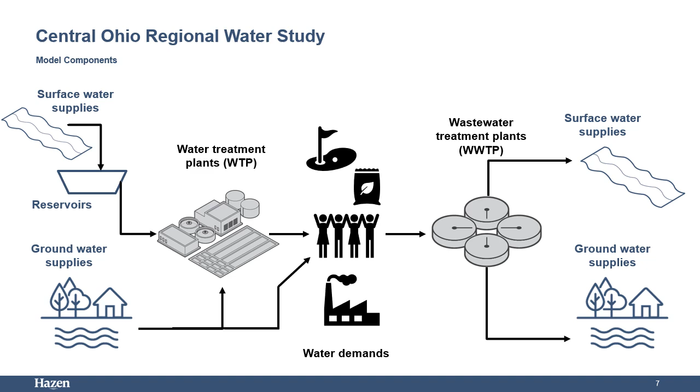Groundwater availability was estimated at the HUC 10 watershed level. To explain, HUC stands for Hydrologic Unit Code, and the 10 stands for the number of digits. The U.S. Geological Survey has delineated each of the watersheds in the country and assigned them a specific number based on their location, similar to a zip code.

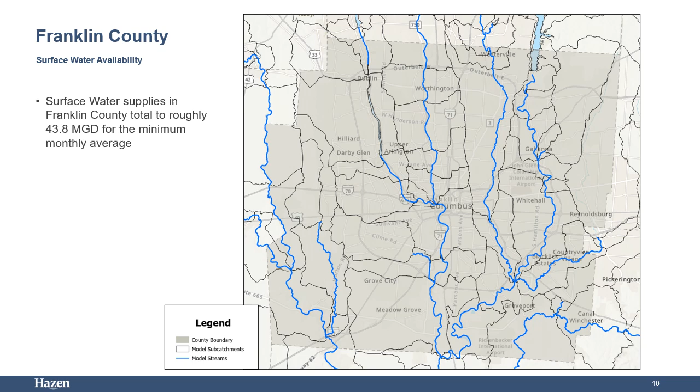The surface water availability value on the previous slide represents the total daily availability of surface water throughout the county during the minimum month as a function of precipitation, temperature, upstream flows, and land cover characteristics. This value does not yet take into consideration the benefit of storage, such as reservoirs, that allow for additional surface water to be available during dry periods.

The City of Columbus raw water supply from surface water is stored in or supplemented by reservoirs. The Columbus Dublin Road plant pulls water from the Scioto River, which has supplemented flows from O'Shaughnessy and Griggs reservoirs, which are both in-stream reservoirs. Additionally, the Scioto River can be augmented from upground reservoirs. The Columbus Hap Cremean plant has its intake on Big Walnut Creek, which has supplemented flows from Hoover Reservoir. Hoover Reservoir also receives augmented flows from Alum Creek Reservoir.

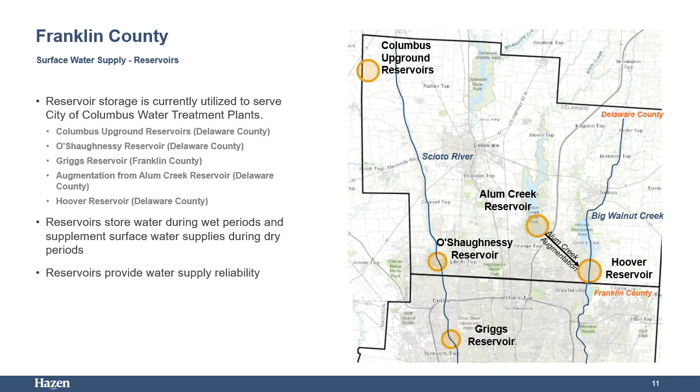The Integrated Water Resources Model accounts for the benefits of reservoirs, therefore allowing the City of Columbus demands to be met by daily surface water availability that is a function of climatic conditions and upstream storage.

Adding both the groundwater and surface water supplies together, it is estimated that Franklin County has roughly 163 million gallons per day of total available raw water supply. This supply availability is roughly 70% groundwater and 30% surface water. Supply availability at the sub-county level varies by location based on aquifer yields and surface water tributary area, and does not include raw water storage in reservoirs as presented on the previous slides.

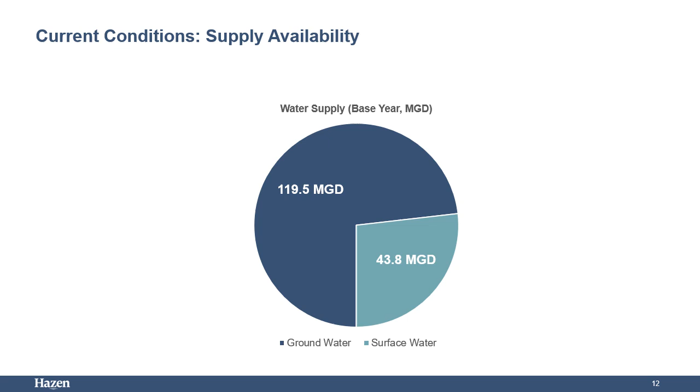The next focus for this resource evaluation was the existing and future demands that draw raw source water from the available water resources. Data on water demand was developed using population data, which was available on a regional basis. The information on current county population was obtained from MORPC, the Mid-Ohio Regional Planning Commission. These population data were used to further calculate water demand.

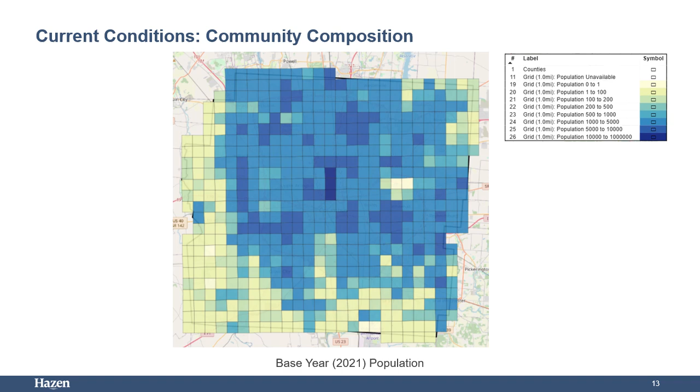A per capita water use was calculated for each service area. This was calculated by taking the water production data and dividing by the assumed population within a service area, which resulted in a per capita water use of gallons per person per day. This per capita water use includes all types of users within the service area, whether it is residential, commercial, or industrial.

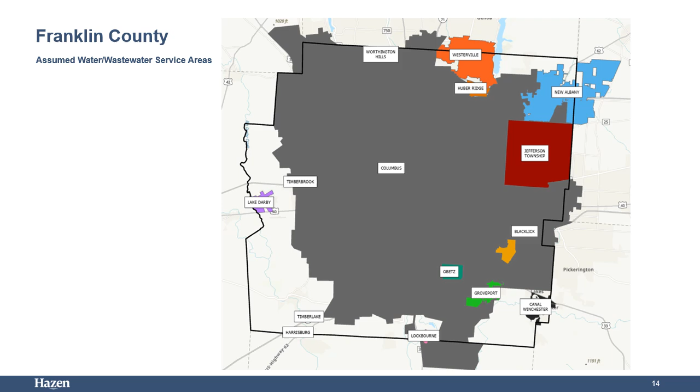It is important to note that in future conditions, no service area expansion was assumed, and the water per capita use for each utility was assumed to stay the same. This means that growth in projected population would also mean a proportional growth in commercial and industrial demand within the utility service area boundary. For future water demands, the per capita water use was multiplied by the assumed future population within a service area.

The next demand, shown in light blue, comes from the private water systems. Private system demand is calculated using the population not within an assumed service area. This population is assumed to be self-serving using groundwater wells. The per capita usage assumed for these private water users is 70 gallons per person per day. The total demand estimated from private water systems users is approximately 1.3 million gallons per day, indicating that the majority of the population in Franklin County is served by a municipality.

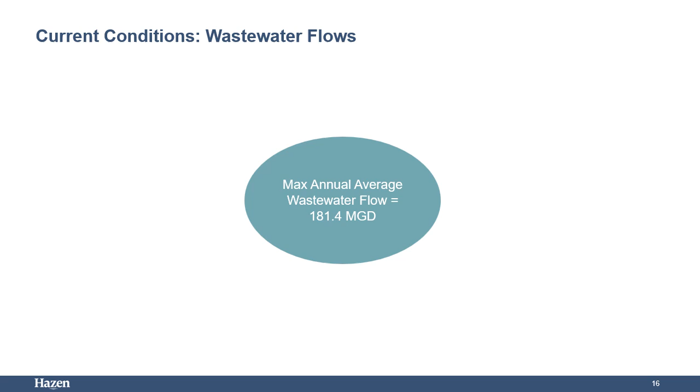This is due to the wet weather impacts observed in wastewater due to the inflow and infiltration impact. During rain conditions, areas with combined sewer systems could see very high flow rates, while during dry times, only the base flow is observed. High rainfall in a single month could skew the average. Therefore, an overall annual calculation is used to determine if a particular plant is nearing its permitted treatment capacity limit.

The existing demands and flows can be compared to the existing infrastructure. In Franklin County, there are a number of water treatment plant facilities, and their total capacity is just over 271 million gallons per day. Roughly 22% of that source water is pulled from groundwater and 78% is pulled from surface water, or the local streams and rivers. A large portion of the water treatment capacity in Franklin County is owned by the City of Columbus, where 2 of the 3 plants pull from surface water and the 3rd plant pulls from groundwater.

Remember that the maximum daily water demands are about 156 million gallons per day. So, in the current conditions, the county has sufficient capacity to provide treated water to meet demands.

From a wastewater treatment plant capacity standpoint, the county has just over 187 million gallons per day of permitted capacity at the existing facilities across the county. The current maximum annual average wastewater flows generated by the demand and inflow and infiltration are about 181 million gallons per day. Again, the existing county infrastructure is sufficient to meet the current wastewater flows.

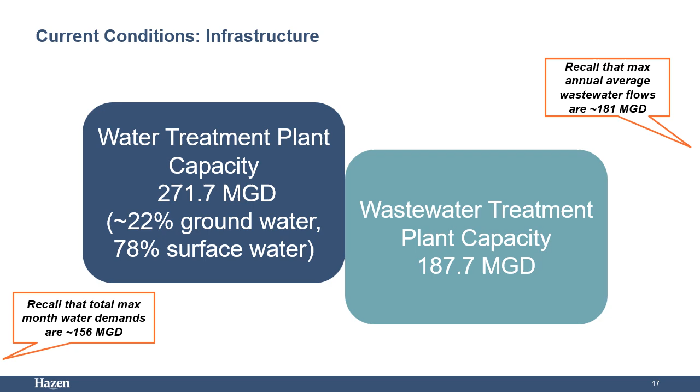With an understanding of the current conditions in the county, the next step was to expand the analysis and explore potential future conditions. This study evaluated conditions in 2030, 2040, and 2050. When analyzing future conditions, current data is projected from the present to the future in time. With that projection comes uncertainty, which is why analyzing multiple potential future scenarios can provide more resiliency and reduce the risk of failure. Scenario planning acknowledges there are several plausible future conditions that may occur and allows planning for several possible future conditions.

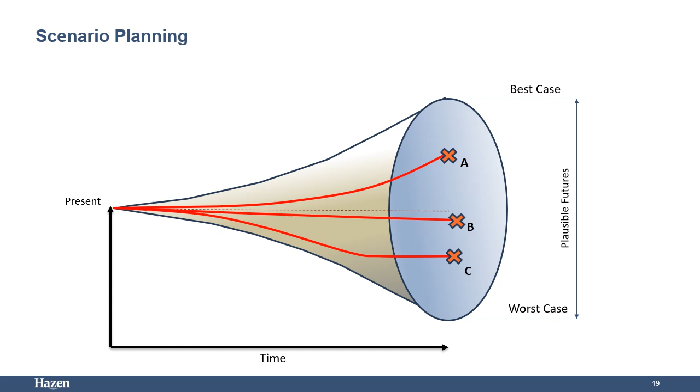4 model scenarios were developed to define the range of potential futures. Scenario conditions that were explored were 2 different precipitation and temperature changes and 2 different population estimates, totaling 4 different model scenarios. The different inputs of these scenarios will be explored further on the following slides.

2 population sources were used for the scenario modeling. The expected growth trend was informed by the Mid-Ohio Regional Planning Commission, or MORPC. The MORPC population projections were informed by local zoning and land use plans. The historical growth trend was informed by the Ohio Department of Development, or ODOD. The ODOD population projections are informed by historical birth, death, and migration trends.

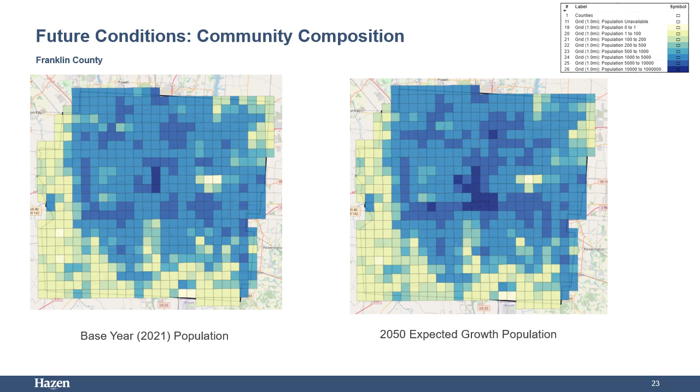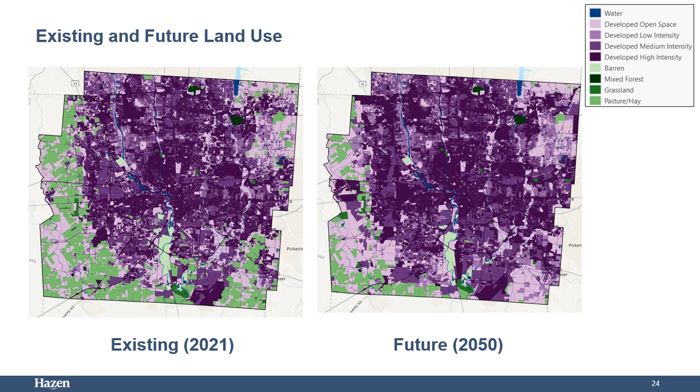Over time, it is estimated that development will occur in areas which were not previously developed, as seen in the southwest portion of the county. Additionally, it is estimated that already developed areas will become high-intensity developed areas, which can be seen on the right figure. As an additional note, when using the dashboard tool associated with this report, Franklin County land use is displayed in quadrants due to the number of features.

Another element of the scenario modeling are the different temperature and precipitation scenarios projected. Historical precipitation and temperature data from 1983 through 2022 were used to estimate the surface water runoff and evaporation. For the future conditions, change factors were applied to the historical precipitation and temperature data to analyze the effects it may have on surface water availability.

Temperature and precipitation changes were based on the global climate model data downscaled to the Central Ohio area. There are different change factors for each month and future planning year, 2030, 2040, and 2050. Change factors were extracted from an ensemble of 49 global climate models from the Intergovernmental Panel on Climate Change.

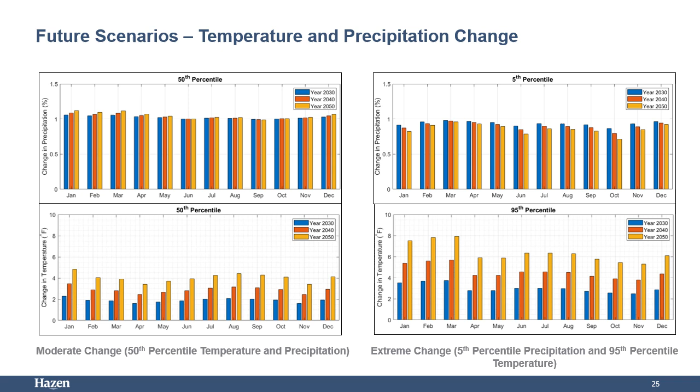The extreme change scenario that was modeled is the hot and dry scenario, which utilizes the 5th percentile change factor for precipitation and the 95th percentile change factor for temperature. The top right graph shows the 5th percentile change factors for precipitation, and the bottom right graph shows the 95th percentile change factors for temperature. A scenario with no future temperature and precipitation change factors was also evaluated.

The easy does it scenario consists of the 5th and 95th percentile temperature and precipitation change factors and the historical growth population estimates. And lastly, the resource abundance scenario consists of the 50th percentile temperature and precipitation change factors and the historical growth population estimates. These four scenarios allow for planning of what different supply and demand conditions may look like and how those conditions compare to the infrastructure needed.

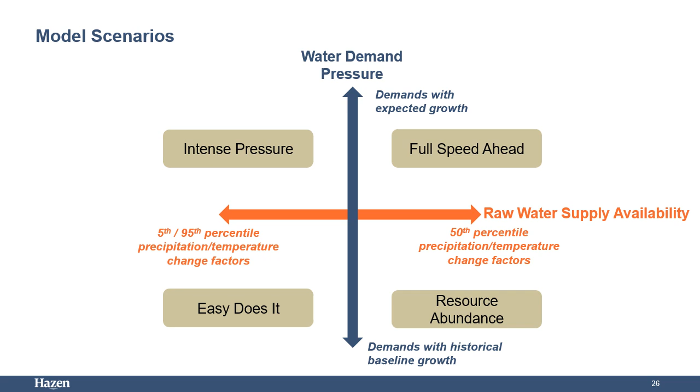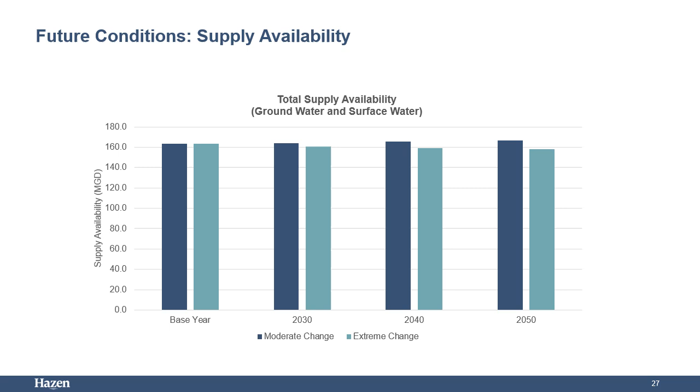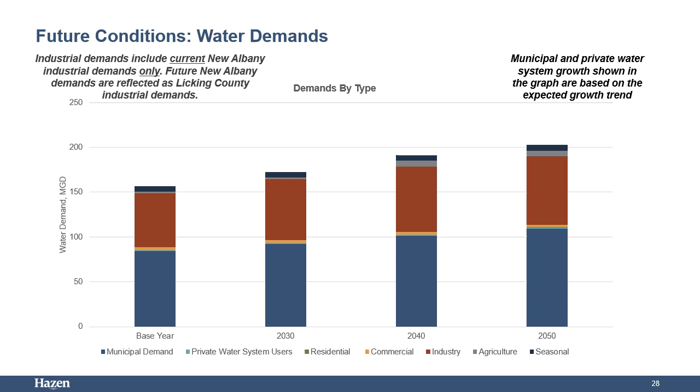The Ohio State University was consulted about assumed increases in future agricultural irrigation water demands. It is estimated that by 2040, agriculture fields will need at least 5 inches of irrigated water during the critical growing season, which occurs between July and September. Based upon this information, the team reviewed future land use to identify where agricultural fields are expected to be in 2040 and 2050, and calculated the water demand that would be needed for 5 inches of irrigation across those agricultural fields. These irrigation demands are present for the 2040 and 2050 condition and are assumed to use groundwater for source water.

Based on the assumed irrigation needs discussed on the previous slide, the agriculture demands were increased by 4.8 million gallons per day at the county level for 2040 and 2050, which is shown in the circled black-gray bars.

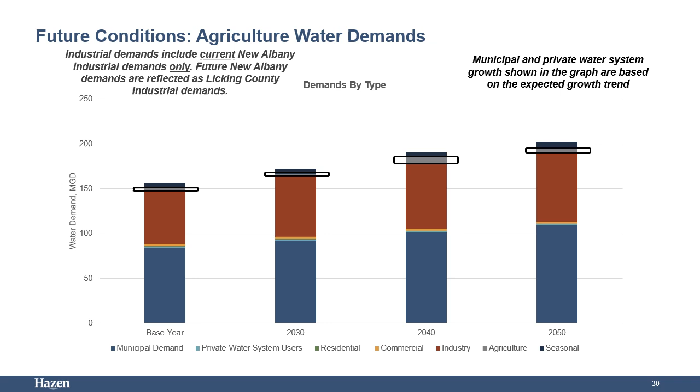Demands for industrial cooling water have increased in the area in recent years, including cooling water demands for data storage and processing centers. Industrial cooling demands have seasonal variability and need more water in the hotter months, as shown on the graph in the bottom right.

These industrial sites are assumed to expand over time, increasing the water and wastewater demand for this sector. The table and graphic on the right show the assumed water use from a single site with cooling towers. Factors that affect water usage include site size, daily temperatures, water quality, and operation.

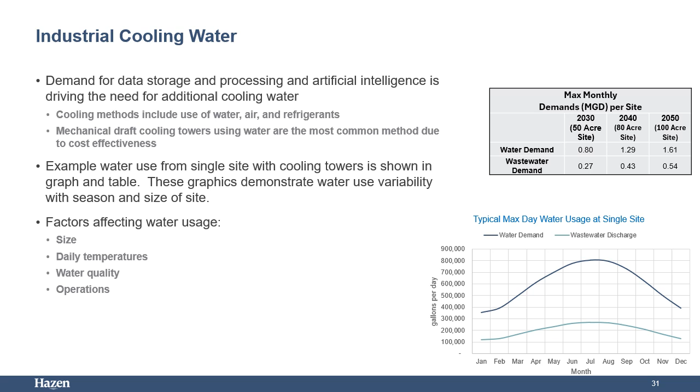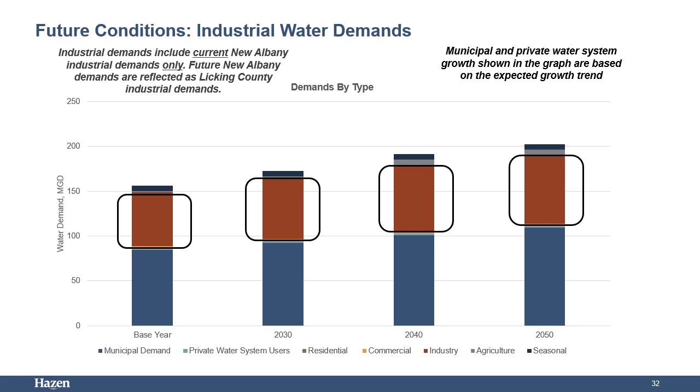Based on the assumptions described on the previous slide, industrial demands are assumed to increase over time and become a large portion of the assumed future water demands in the county, as shown in the circled red bars. Note, this does not include additional industrial demands in Licking County that are projected to be served by the City of Columbus.

Previously, the current water and wastewater capacities were explored at the county level. Several future new or increased infrastructure capacities were assumed to be completed for facilities that are currently either in detailed planning or design, under construction, or in the permitting process.

For Franklin County, the assumption is a new 48 million gallon per day water treatment plant is to be integrated into the Columbus system starting in 2030 and continuing for 2040 and 2050. While the plant is to be constructed in Delaware County and pull source water from the O'Shaughnessy Reservoir, this additional water treatment capacity will be evaluated in Franklin County as it serves the demands within Franklin County.

Planning for additional upground reservoirs is also ongoing, and they are modeled to be online in 2040 and 2050. Additionally, the City of Columbus is investigating optimization and expansion at their Southerly wastewater treatment plant.

In this section, we will discuss water resource and related infrastructure needs at the county level. The graph shows combined surface water and groundwater supplies in orange, max month municipal water demands in light blue, and water treatment capacity in dark blue over time.

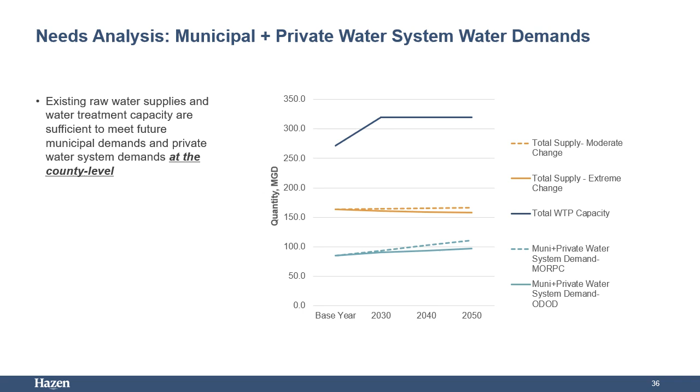Finally, when assumed industrial demands are added, the raw water supplies are not sufficient to meet the water demands at the county level. The demands surpass the raw water availability by 2030 at the county level. However, it should be noted that Franklin County has partnerships with surrounding counties.

There is currently one, and there will be 2 additional upground reservoirs in Delaware County that will supply raw water to the City of Columbus to supplement surface water availability in Franklin County. With these considerations, it can be assumed that Franklin County has sufficient raw water resources in both Franklin and Delaware County to meet future demands.

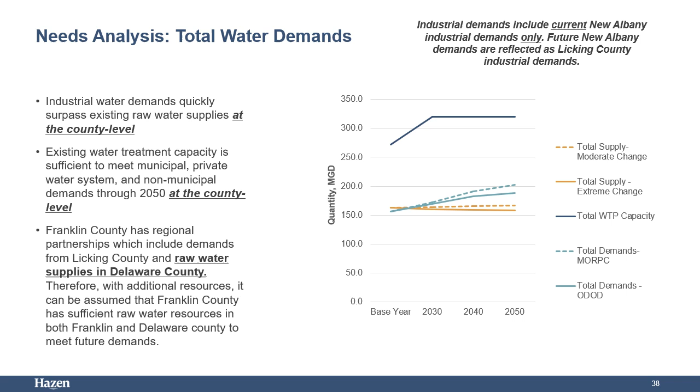This and the following slides present similar information but relative to wastewater treatment capacity. On this graph, the annual average municipal wastewater flow for the expected growth trend is shown in light blue, and wastewater treatment capacity is shown in dark blue at the county level.

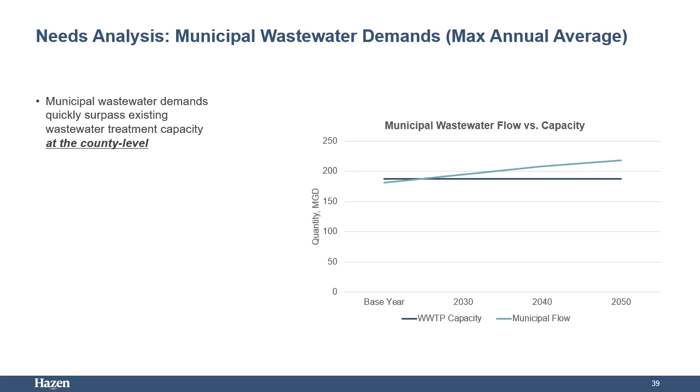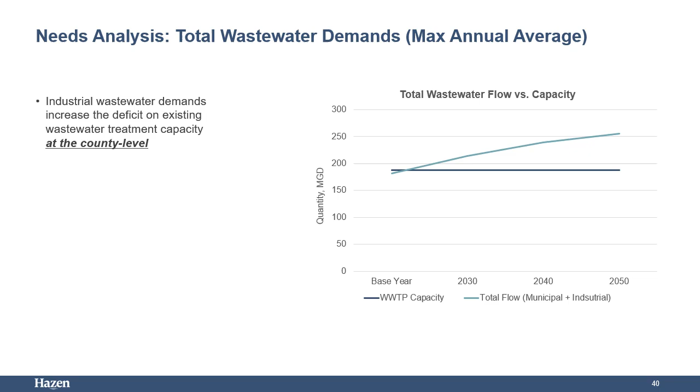The previous section evaluated supply and infrastructure availability relative to demands at the county level. This following section will address resource gaps and abundances when you consider where those supplies, infrastructure, and demands are projected to occur within the county.

The dashboard planning tool that was created as part of this study helps users visualize the resource gaps and resource abundances. The nodes on the map are color-coded by type and are sized based on how large of a gap or abundance there is for that given node. If a node is filled in red, that indicates a gap. Gap definitions are as follows.

For a surface water node, is any shortage observed? For a reservoir node, does the usable storage ever reach 20%? For a groundwater node, does the remaining groundwater amount ever reach 0? For a water treatment plant, is the maximum monthly average flow greater than 80% of the permitted capacity? For a wastewater treatment plant, is the maximum annual average flow greater than 100% of the permitted capacity?

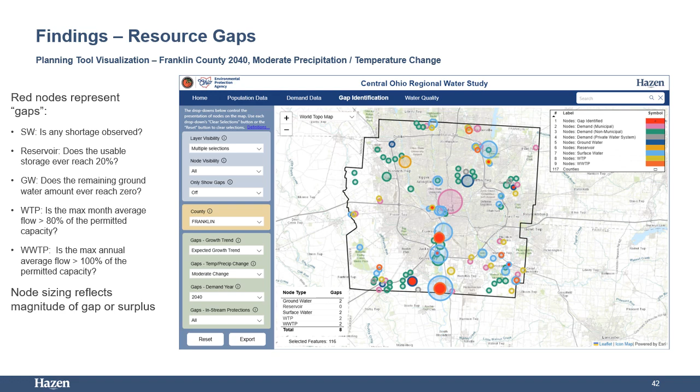This table summarizes resource gaps within the county for each scenario and model year. There are at most 9 gaps for any given year and scenario for the entire county. The identified resource gaps are both infrastructure-based and raw water supply-based. These gaps will be explored further on subsequent slides.

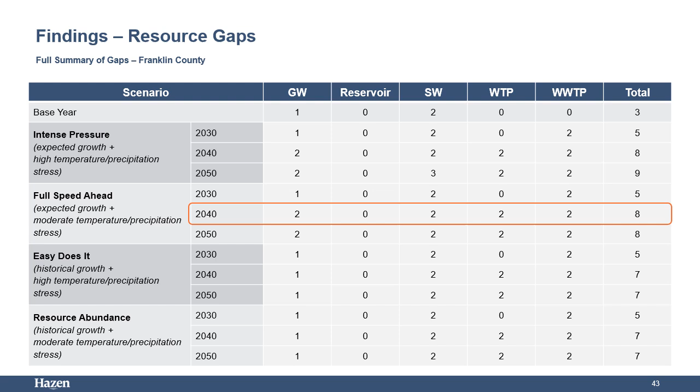Findings in the subsequent slides reflect the expected growth and moderate temperature and precipitation change in 2040. The 2040 full speed ahead scenario was selected as the target planning scenario to allow stakeholders to assess the current and future project needs without extending too far into the future while using reasonable temperature and precipitation projections. The following slides will provide detailed discussion of the potential projects that could fill identified water resource and infrastructure gaps within Franklin County.

The project focused on identification of opportunities and strategies to fill those resource or infrastructure gaps. Gaps can be filled through a variety of ways depending on the type of gap. For example, a supply gap could be filled by constructing a reservoir or implementing a policy to restrict use during times of low supply availability. Other solutions include expanding treatment capacity and leveraging reused water. Gaps are often filled with a project or a set of projects.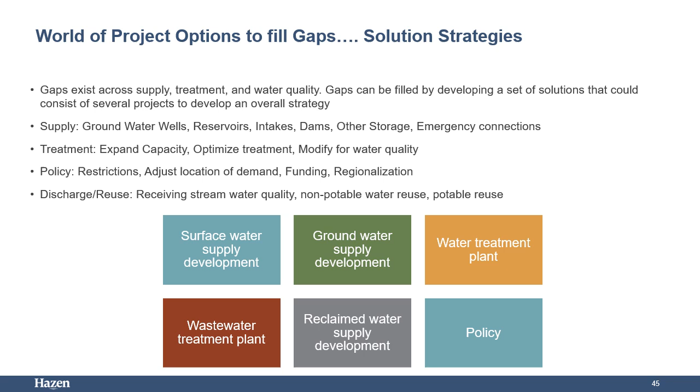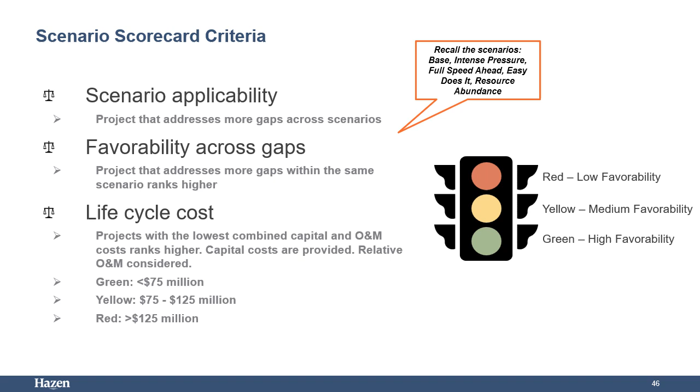Life cycle costs are another important consideration. The total life cycle costs include construction, operation and maintenance, and other projected costs. Water quality impact considers impacts associated with development, as well as changing water and wastewater use. A project that provides higher protections to water quality ranks higher. Finally, a project with a shorter implementation time would be considered more favorable since the benefits of that project would be realized sooner.

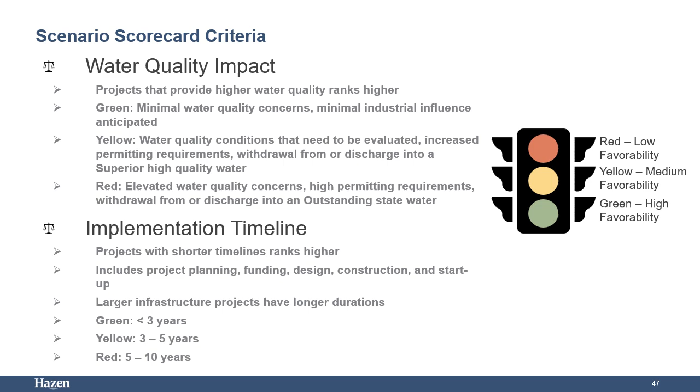The next few slides provide solution strategies for the 2040 full speed ahead scenario. Note that findings of the resource gaps were previously discussed and can be further explored using the dashboard planning tool. The dashboard facilitates scenario planning where gaps in other scenarios may also be filled with projects. Generally, the projects provide solutions for gaps beyond the 2040 full speed ahead scenario. Pre-planning level projects are provided as examples and possible solutions to fill gaps. Additional efforts are needed to define, plan, and implement a project as outlined in next steps.

Further detail on these gaps is provided in tabular format on the next slide. Projects were categorized by type. Local, where the utility largely uses its own assets to fill gaps, or an industry provides its own on-site solutions. Regional, where utilities collaborate with other utilities. And reuse, where a utility leverages reuse water to provide non-potable water to an industrial user to reduce potable water demand.

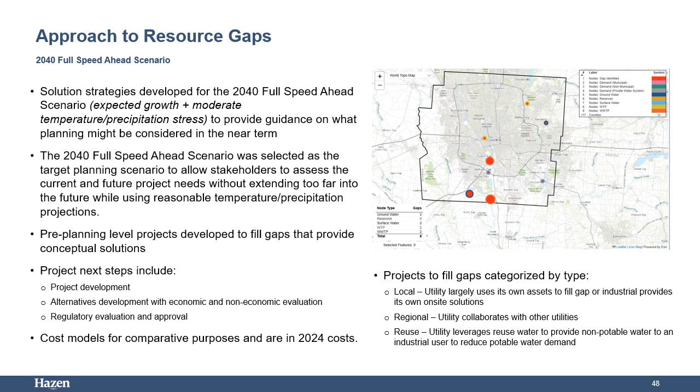This table provides detailed information on the projected resource gaps in the 2040 full speed ahead scenario in Franklin County. The two Columbus wastewater plants, Jackson Pike and Southerly, both treat waste from industrial and municipal sources. In 2040, they are projected to have significant gaps. Project options can be evaluated that address both wastewater treatment plant gaps.

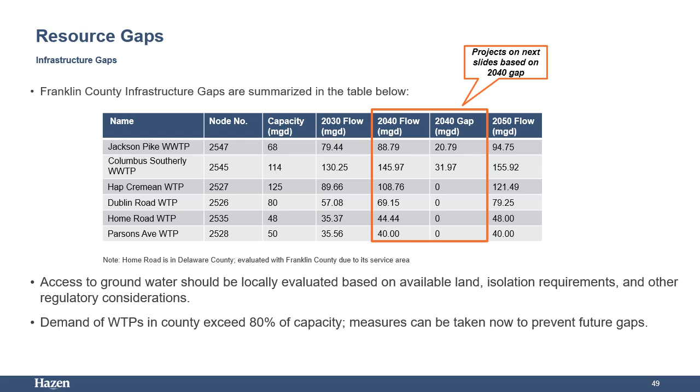4 water treatment plants are flagged since their demands in 2040 are projected to exceed 80% of their plant's capacity. Home Road Water Treatment Plant is technically located in Delaware County, but will be evaluated with the Franklin County water treatment plants since the plant serves Franklin County.

Franklin County is projected to have 4 source water gaps in 2040, based on the maximum day demand. Scioto Big Run is largely impacted by industrial demand and is estimated to have a 0.16 million gallon per day gap. George Creek is impacted by agricultural demand and is estimated to have a 0.22 MGD gap. Blacklick Creek, Big Walnut Creek has both municipal and industrial demands, estimated to have a minor gap of 0.02 million gallons per day.

Scioto Big Run, Scioto River is estimated to have a 15.66 million gallon per day gap, driven by quarry dewatering and groundwater demand feeding Parsons Avenue Water Treatment Plant. However, the Parsons Avenue Water Treatment Plant well field is split across 2 groundwater HUCs, and the HUC to the east does have availability. This edit will be added in future model and dashboard updates. That shift in resources in the model will eliminate the gap predicted at Scioto Big Run.

Several demands in the 15 county area that are categorized as non-municipal demands represent current pumping associated with quarry dewatering operations. In this integrated resource model, quarry demands are simulated as follows. Existing quarry dewatering demands are assumed to remain constant over the planning horizon. Dewatering demands are served by groundwater only after all other demands are met. If existing quarry dewatering demands cannot be met by remaining groundwater supply after other demands are met, this shortfall does not contribute to any calculated shortages because quarry dewatering demands are not those that actually need to be provided with water.

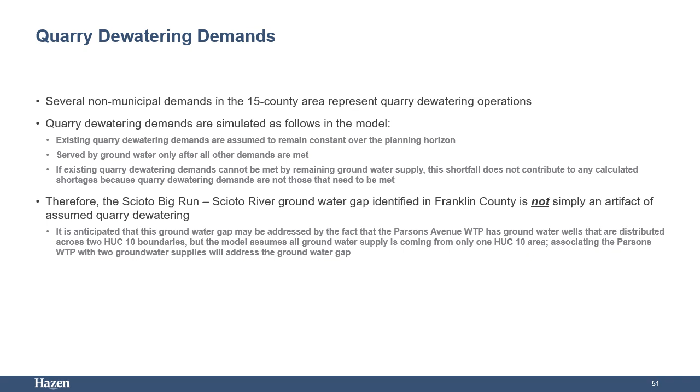Columbus wastewater treatment plants are projected to have a significant gap in 2040 based on population and industrial growth. Table 1 shows the combined capacity and flows of the plants, which created a total gap of 52.76 million gallons per day. Table 2 shows these values separated by treatment plant. Planning level projects were developed to fill both the wastewater treatment plants' gaps. Projects were categorized by local, regional, and reuse, as previously discussed.

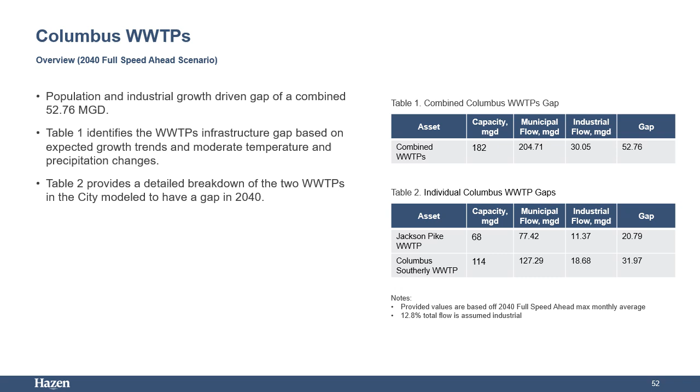Option A is to expand Columbus Southerly Wastewater Treatment Plant by 112 million gallons per day, sized to meet the gap plus additional capacity to ensure the projected 2040 demand of the two plants is below 80% total capacity. Jackson Pike is not currently a viable option for expansion. The total cost for this project is approximately $1.5 billion.

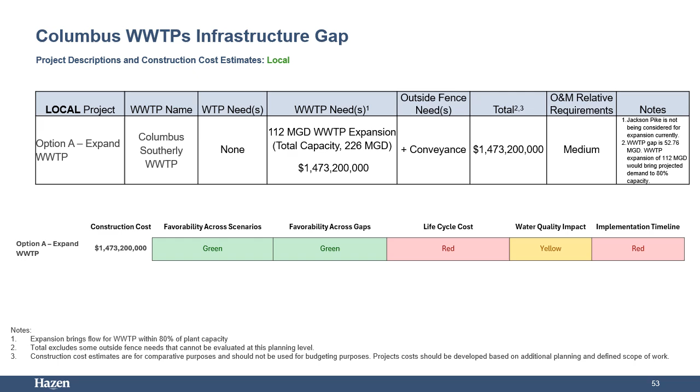One local project example is indicated on this slide. Note that there are potentially more options which may arise if alternative future scenarios are considered. Option A is for Home Road to expand the water treatment plant by 25 million gallons per day, sized to meet the Franklin County water treatment plant gap, plus additional capacity to provide for future users. No wastewater treatment plant upgrade is required. O'Shaughnessy Reservoir has sufficient capacity to accommodate this expansion. The total cost is about $262 million.

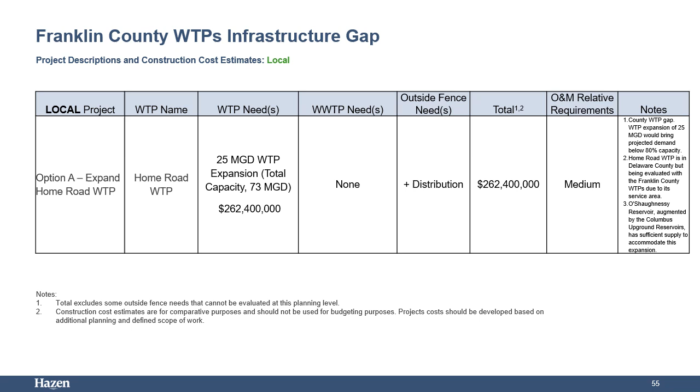One regional project example is indicated on this slide. Note that there are potentially more options which may arise if considering potential opportunities to partner with other utilities. Option B reflects the construction of a new 25 million gallon per day regional facility that would be shared across the area. It is sized to meet the Franklin County water treatment plant gap, plus additional capacity to provide for future

users. This project may be considered if there is regional interest and support, and if expanding Home Road water treatment plant is not viable. O'Shaughnessy Reservoir has sufficient capacity to accommodate this expansion. The total cost is about $262 million.

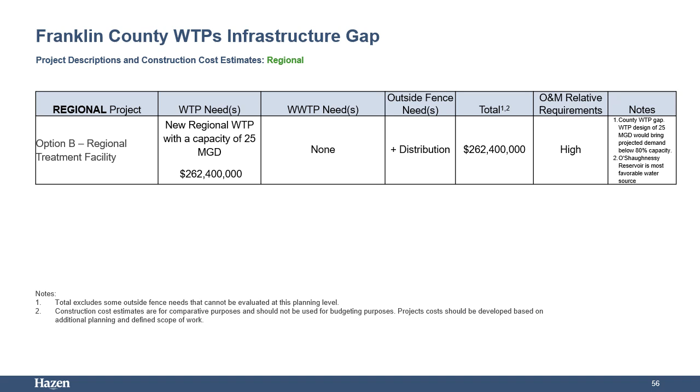The third project category under consideration was reuse. Leveraging water reuse is a way to reduce demand on water supplies and drinking water treatment plants. Reused water is often compatible with the water quality needs of industrial users. However, influent water quality needs can vary from user to user. This slide presents two potential reuse projects for consideration.

Option C evaluated the addition of reuse capability to one of the wastewater treatment plants in Columbus. Projected industrial demands can be met with non-potable reclaimed water instead of potable water. This reuse addition would allow for the county's water need to be met without having to construct a new water treatment plant.

Option D provides another regional solution to construct a new scalping wastewater treatment plant or reuse facility located near large industrial demands. This option evaluates adding reuse capabilities to a new regional wastewater treatment plant as a sustainable opportunity to reduce reliance on potable water. This option would only be practical if a new regional wastewater treatment plant is needed.

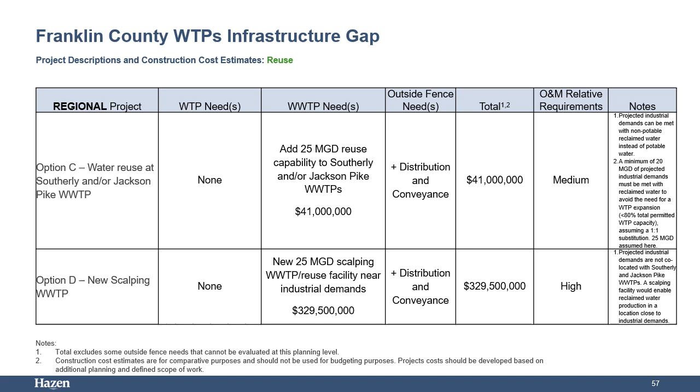Note that distribution and conveyance cost would be lower for this option than option C because the facility will be built closer to industrial demands, whereas Columbus Southerly and Jackson Pike wastewater treatment plants are not co-located with industrial demands. The various options described as A through D were then evaluated using the project scorecard, with green cells indicating options with highest favorability.

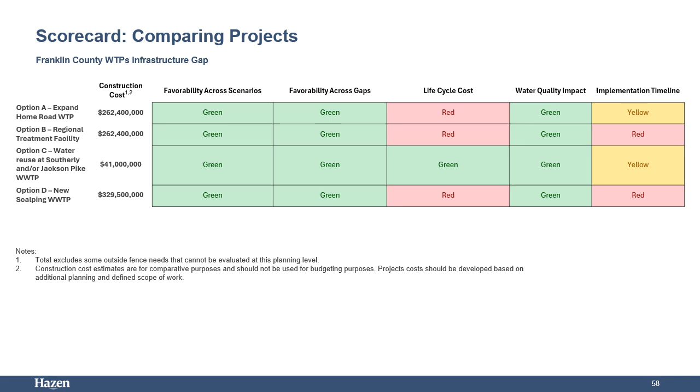A regionalized water treatment plant could be considered to serve service areas in Franklin and Delaware County. Required and planned expansions were estimated by calculating the excess demand of 80% of each plant's capacity. Water should be available from O'Shaughnessy Reservoir to be treated. Note, this is highlighted in the Delaware County presentation as well.

This next section will present the evaluation conducted to determine areas of opportunity, which are defined as areas where there is assumed modeled surplus capacity. It should be noted that this section only identifies potential areas for opportunity. Project planning and utilization of surplus capacities will require further evaluation and discussions with local municipalities and stakeholders.

First, water supply areas of opportunity will be discussed. Raw water supply sources in the county have opportunity for growth. There is surface water opportunity on the southern portion of the county, specifically in the Scioto River, downstream of the Columbus wastewater treatment plant's discharge.

Additionally, there is available raw water storage in neighboring counties that can serve demands within Franklin County. Both the Columbus Upground Reservoirs and Westerville Reservoir have raw water storage available for opportunity. There is less groundwater opportunity than surface water, but there is still some available groundwater opportunity throughout the county.

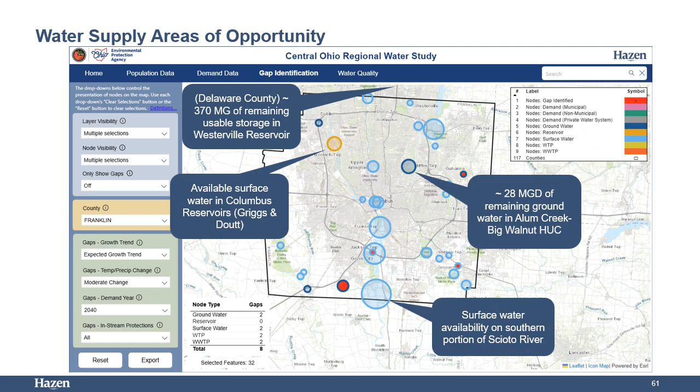Next, we looked at the areas of opportunity or surplus resource with regards to water and wastewater infrastructure. Westerville has remaining water treatment capacity. One source water for Westerville, the Westerville Reservoir, was identified as an area for opportunity as well. Though they are currently labeled as gaps, there are areas of opportunity within Columbus's wastewater treatment plants.

Because of investments that Columbus has made and continues to make, they will be able to serve new growth. The city is currently working on an optimization project that will help plan for future expansions. The city is also exploring options for reuse facilities that may reduce flows to the treatment plants.

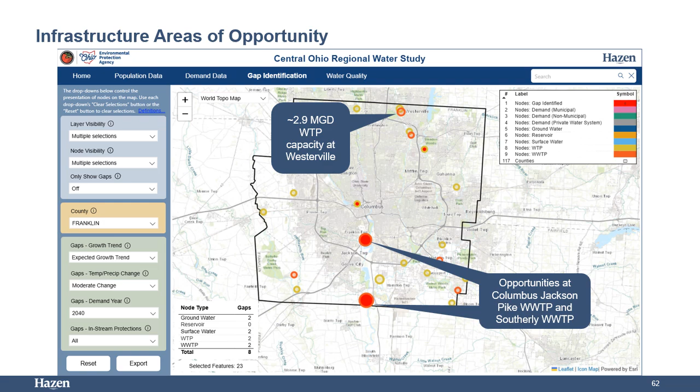This next section will present the project findings relative to projected water quality across the planning horizon. While the Central Ohio Regional Water Study was primarily focused on water supply and treatment capacity, the models developed were also used to project potential impacts to water quality that may occur due to the changes in population, land use, infrastructure, and future temperature and precipitation changes.

The goals for the water quality assessment were to characterize existing water quality conditions. The study identified watersheds with the highest existing water quality. Such pristine watersheds were considered to be the most sensitive to future development. Determine potential impacts. The study developed potential impact factors based on available data and the suite of possible future scenarios, including those evaluated for water supply and treatment.

Watersheds were characterized as having higher or lower potential for impacts based on the identified impact factors. The scenarios use a range of future conditions. The intent is to illustrate where water quality impacts will likely occur. And finally, to provide recommendations and activities that could be completed by local agencies, utilities, and organizations to help offset, mitigate, and protect against water quality degradation.

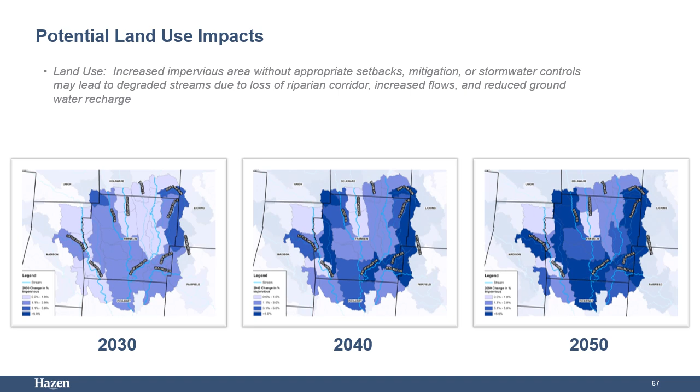Hydromodification impacts. When streams see higher flows and/or more frequently occurring storm events, stream banks may experience increased erosion. With these flow changes, streams may become incised and disconnected from floodplains, resulting in a decrease in water quality and increase in suspended solids. A stream model was developed for the entire 15-county service area to simulate stream flow from runoff as well as from wastewater treatment plant infrastructure.

Future scenarios were developed that examined the impact of changes in population, land use, and temperature and precipitation on projected flows. 40 years of simulated stream flow were analyzed to determine the impact of different future scenarios on projected flows. Flows from the model were used to determine which watersheds may have a higher potential for channel modifications due to changes in flows.

Watersheds in dark blue have higher potential for future hydromodification impacts based on the regional watershed model. For watersheds with a downstream modeled link, any of the watersheds that saw a 10% or higher increase in projected flows during frequently occurring storm events were designated as having a higher potential for hydromodification to occur. The watersheds with a lower potential may still experience hydromodification in isolated instances, but changes are not projected to be as significant given the range of forecasted scenarios.

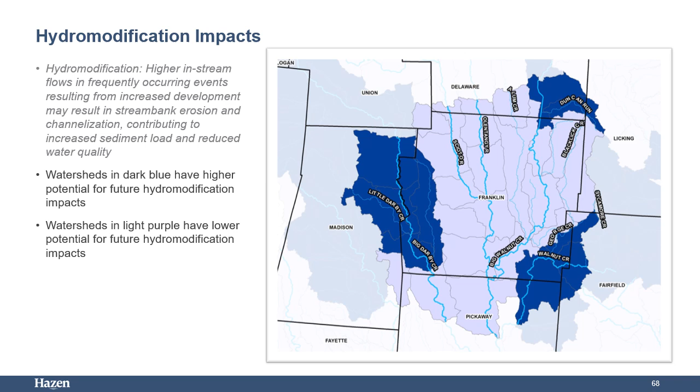Increased occurrence of low flows. During dry weather conditions, healthy streams may typically maintain base flows to support aquatic life. If these low flow periods are extended or flows are projected to be even lower, it may have a negative impact on water quality and lead to more restrictive permitting requirements.

The stream model was used to simulate stream flow from runoff as well as from wastewater treatment plant infrastructure. Future scenarios were developed that examined the impact of changes in population, land use, and temperature and precipitation on projected flows. 40 years of simulated stream flow was analyzed to determine the impact of different scenarios on projected flows. Flows from the model were examined, and an evaluation of flows during the driest periods was conducted to determine which watersheds may have a higher potential for water quality impacts due to decreased base flows during drier periods.

Watersheds in dark blue have higher potential for future water quality impacts and more restrictive permitting requirements related to increased occurrence of low flows. For watersheds with a downstream modeled link, any of the watersheds that saw a 10% or greater decrease in projected flows during low flows were designated as having a higher potential for water quality impacts.

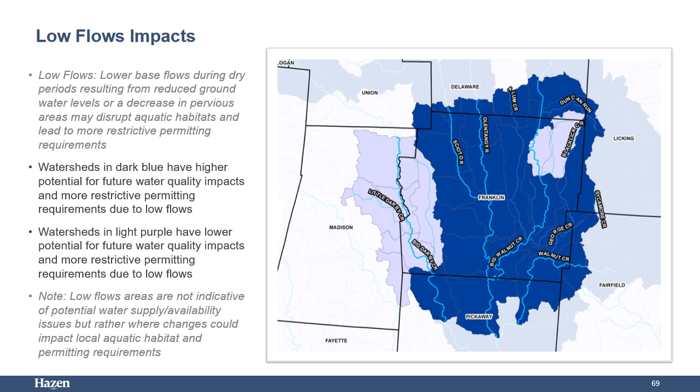Temperature and precipitation. Changes in temperature and precipitation were considered in multiple scenarios. The stream model was again used to evaluate the impact of temperature and precipitation conditions during low flows. In some watersheds, the impact of the changing temperature and precipitation on stream flows was found to be more significant due to lower flows during dry conditions, especially areas that were not able to offset low flow through either wastewater treatment plant effluent or increased runoff.

The model used 40 years of simulated stream flow to determine the impact of different scenarios on projected flows during drier periods. In some watersheds, the impact of temperature and precipitation on stream flows was found to be more significant due to lower flows during dry conditions that were not able to be offset through either wastewater treatment plant effluent or increased runoff. Watersheds in dark blue have higher potential for future low flow impacts due to temperature and precipitation change. A high impact, dry, temperature and precipitation scenario was compared against a medium impact temperature and precipitation scenario.

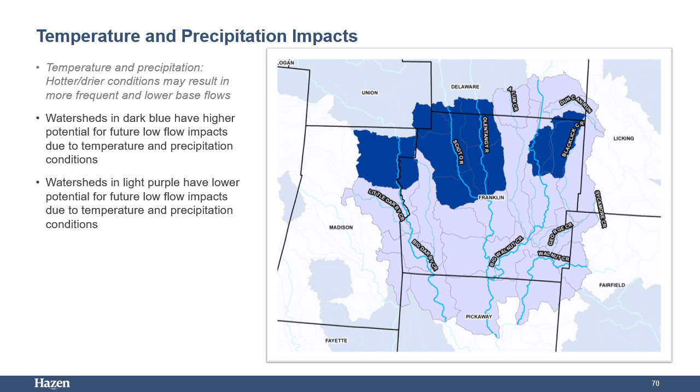The Central Ohio Regional Water Study dashboard can be utilized to examine individual watershed characteristics and identify watersheds with excellent water quality and high potential for future impacts. Those watersheds can be considered and prioritized for protection, conservation, and restoration activities. Several potential mechanisms are available for water quality protection.

With potential water quality impacts identified, considering water quality protection is the next step. Water quality protection is a critical part of any water resource plan. It is important to understand that streams are constantly changing due to a number of factors, including vegetative communities, adjacent land uses, and changing temperature and precipitation. The magnitude of change over the next few decades will vary across the region and is subject to several variables.

Current development plans indicate that development pressure is being increased in areas that are rapidly developed. Proper protections should be in place prior to development and significant land use changes in order to protect local water quality while supporting economic development.

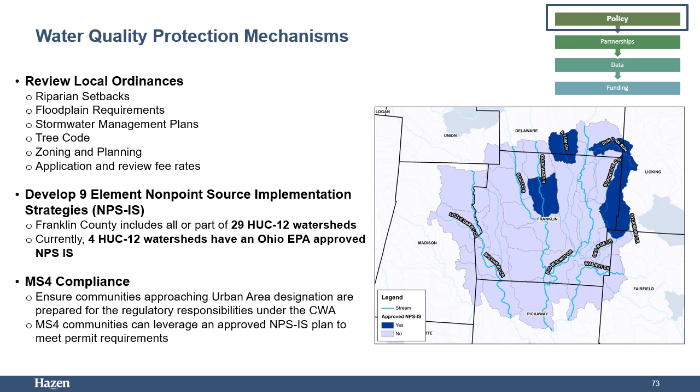MS4 communities can leverage a NPSIS plan to meet permit requirements by identifying watershed-specific strategies and projects that improve water quality. By integrating data collection efforts from NPSIS plans into MS4 compliance activities, municipalities can improve regulatory efficiency, strengthen funding opportunities, and enhance water quality improvements.

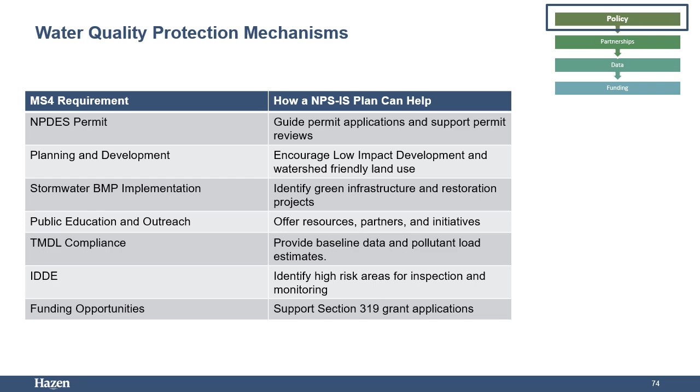Strengthen partnerships between municipalities, watershed organizations, and other local governmental agencies. Communities don't need to work alone. Planning efforts are typically developed with input from state and local agencies, watershed groups and nonprofits, soil and water conservation districts, and universities and research institutions. By coordinating efforts with these stakeholders, communities can collaborate, get together and coordinate current issues and upcoming plans, meet regularly to discuss trends, projects, and upcoming plans.

This can be outlined in stormwater master plans and can be expanded upon to involve additional stakeholders to discuss overall watershed action items. Invite guest speakers to learn about new opportunities. Representatives from existing partnerships or outside agencies can share success stories, lessons learned, and upcoming opportunities for projects and funding.

Collaborate data collection and permit review responsibilities. Ensure responsibilities are delegated appropriately and that all partners have the resources they need to carry out said responsibilities. Link data between agencies through GIS. Pull the data collected and create a GIS database that is linked. This allows for partners to readily use data that is already available.

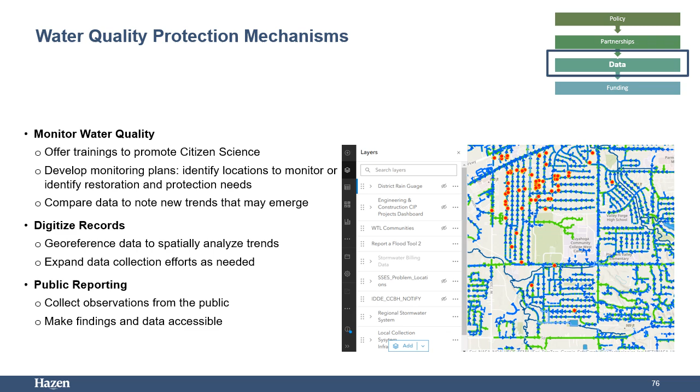Prioritize infrastructure upgrades. Secure funding for critical infrastructure such as stormwater management systems, wastewater treatment plant upgrades, and failing septic system replacements to support growing populations. Focus on areas identified as current or near-term gaps. Consider future scenarios to inform planning decisions, and assess regional optimization of services as early as possible.

Incentivize sustainable practices. Establish funding programs to encourage developers to adopt green infrastructure and other low-impact development techniques that minimize the environmental impact of new construction. Stormwater best management practices include bioretention, pervious pavement, and extended detention. Encourage redevelopment over new development where possible. Proactively identify areas that are suitable for redevelopment.

Leverage grant programs. The Clean Ohio Green Space funding is available for preserving green space or riparian areas and may be used for property acquisition. The Ohio EPA Water Resource Restoration Sponsor Program is for nonprofit organizations, parks, and municipalities, and they may apply for funding to protect or restore high-quality water resources as an implementer. There's a competitive annual process that connects recipients with a sponsor. Interest from the sponsor's WPCLF loan ideally pays for the implementer projects.

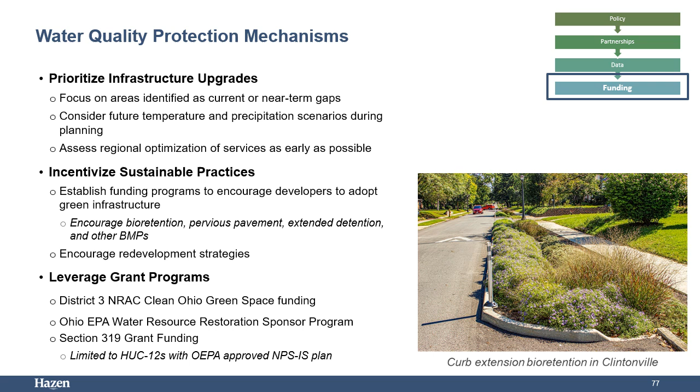Section 319 grant funding is available for HUCs with NPSIS plans. There are 4 HUC 12 watersheds with approved NPSIS plans in place in Franklin County. H2 Ohio provides funding through H2 Ohio Rivers and H2 Ohio Wetlands. The Rivers program has several grant funding opportunities. Those that are applicable are listed, as well as the coordinating state agency.

Agricultural Incentive Program. In 2024, Governor DeWine announced a statewide expansion of H2Ohio producer initiatives, making the initiative available for the first time to producers who farm outside of the Western Lake Erie Basin. For the first round of statewide enrollment, ODA offered enough funding and resources to enroll a new 500,000 acres outside of the Western Lake Erie Basin. More than 525 producers in 51 additional counties enrolled in 2024.

The program incentivizes farmers to implement science-based, proven best management practices to prevent nutrient runoff and improve water quality. ODA works closely with county soil and water conservation districts to administer participant contracts, provide technical assistance, and support producers.

The U.S. Department of Agriculture and the state of Ohio are partners in implementing a voluntary Conservation Reserve Enhancement Program, CREP, to enroll up to 67,000 acres of agricultural land in the Lake Erie watershed and to enroll up to 70,000 acres of agricultural land in the Scioto River watersheds within the state of Ohio.